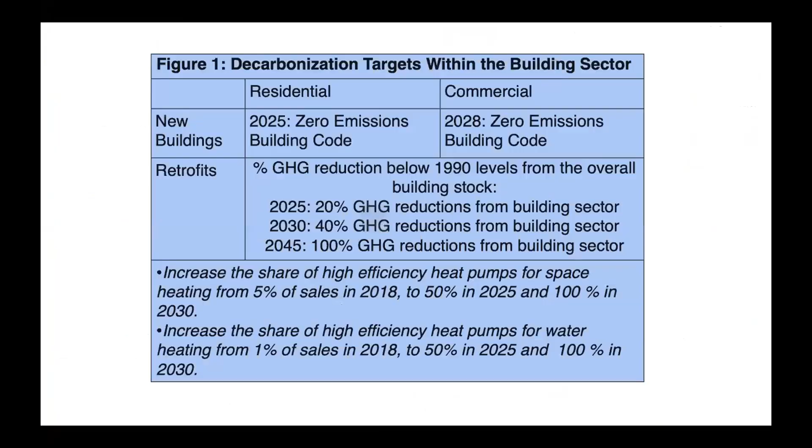Earlier this year, the coalition adopted a roadmap, which was our recommendations for where we think California should be going to eliminate greenhouse gas emissions from the built environment. This was a consensus document agreed to by, at the time, 90 of our members. We've grown another 60 or so members since January. And it laid out some numerical goals that we thought California should meet, including the state should adopt a zero emissions building code for residential buildings by 2025 and commercial buildings by 2028. And that through retrofits, policies, programs, incentives, financing, et cetera, we would bring about a complete elimination of greenhouse gas emissions from the built environment by 2045 or sooner.

Implicit in that is the sales numbers for heat pump technology, air source heat pumps and heat pump water heaters, to dramatically scale sales so that by 2030, 100% of all heating equipment sold in California would be of the heat pump variety. I will just say that as of this week, we now have 17 local governments that have adopted a reach code that either discourages or completely disallows natural gas hookups in new construction. Pacifica and Santa Rosa on Tuesday became the 16th and 17th cities to adopt policies like that. And then we're going to see a wave more. By the end of the first quarter of next year, we're expecting that about 40% of Californians will live in a jurisdiction that's adopted a building decarbonization policy.

Behind those numerical goals, the coalition also identified 5 goals that are going to be necessary if we're going to meet these targets. The first one is really building awareness across all participants within the energy space in California, from providers to businesses to end users. We need to make sure that through rates and rebates and financing, customers are receiving a good value for the building decarbonization measures that they install. And we need to make sure that the builders and installers are actually making more money installing electric appliances that rely on clean electricity rather than fossil fuel appliances.

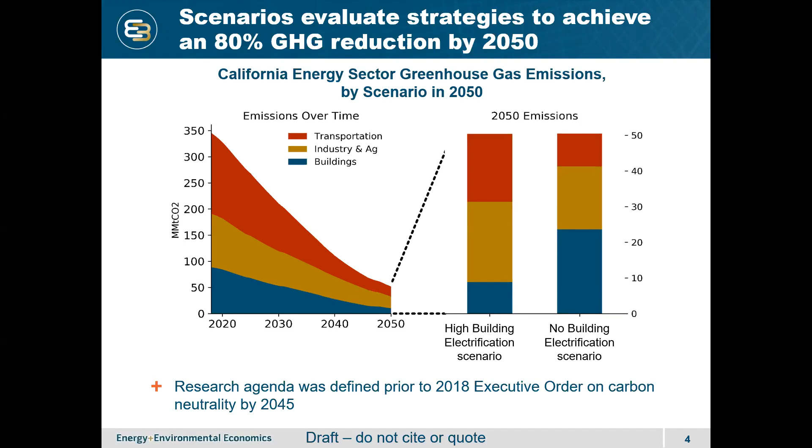As I mentioned, we used the California Pathways model to model these and work them up. And that work is really building on a report that we published in 2018, also with the California Energy Commission EPIC research grant. And that study is called Deep Decarbonization in a High Renewables Future, if you're interested in learning more background about our modeling approach and framework.

So across all of these scenarios, there are 4 key strategies to decarbonize energy. And these 4 strategies, energy efficiency and conservation, electrification, low carbon electricity, and low carbon fuels, are common across all of the scenarios that we've ever evaluated and all of the regions that we've looked at. Even outside of California, we've done deep decarbonization scenario work in Minnesota and the Pacific Northwest, across the U.S. as a whole, other places in the U.S., and these 4 themes are consistent.

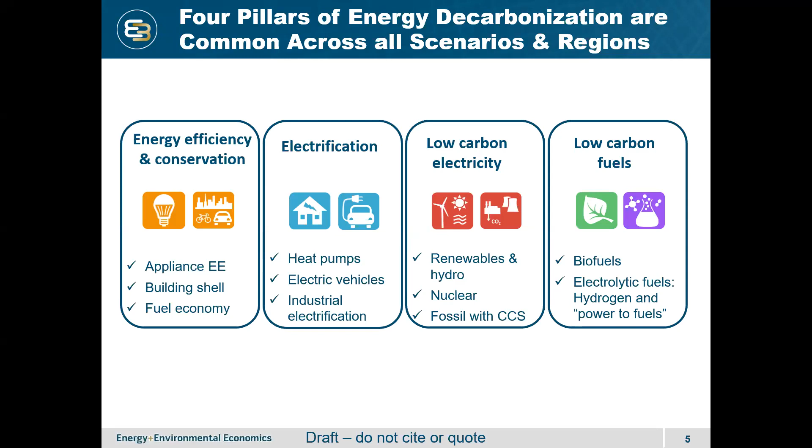What varies is the relative emphasis on each of them and the different strategies that can be employed within one of the given pillars. So I'll talk about how we use each of these in our work going forward. This work is really focused in on strategies to reduce natural gas emissions from buildings. And I'll talk a little bit more about the reason for why that is.

We were looking at the natural gas distribution system in California. And it turns out that the majority of that system is built and designed to provide gas to buildings. We have transmission level pipelines that serve gas primarily to industry and electric generation. But the bulk of the cost of the system is really in the distribution system, and that's all aimed at getting gas to buildings. So how do we reduce gas from buildings?

And as I said, we looked at these two bookend scenarios, a no building electrification scenario where we're blending renewable natural gas in the pipeline, and a high building electrification scenario where we're really emphasizing a transition towards electrification and electric heat pumps. There may be a third option, which is a hybrid option where you could have electric heat pumps with gas backup for reliability and meeting peak heat needs.

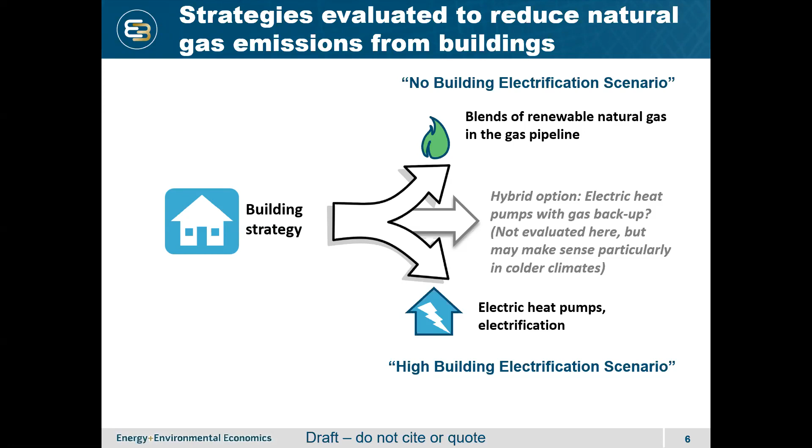We didn't evaluate that in this work, but it might make sense, particularly in colder climates, where we've been doing some work in Minnesota, for example, the Pacific Northwest. Some of these hybrid options might make more sense than they do in California's relatively mild climate.

Okay, so what is renewable natural gas? Just to lay the foundation, we're talking about 4 different strategies in general. Going from the left to the right, you've got waste biogas, and that can come from things like municipal waste, landfill gas, wastewater treatment facilities, dairy, manure, methane capture. And those tend to be the lowest cost and most commercialized of these options, but they're also limited in supply because of the availability of those waste resources.

You've got gasification of biomass as another option, and that involves taking either waste and residue, agricultural and forest products, gasifying it and turning it into biomethane. Or you could even assume that there's purpose-grown crops, such as developing switchgrass or miscanthus and turning that into biofuels.

In these scenarios, we don't assume that there are any purpose-grown crops due to both the lack of commercialization of that pathway as well as the land use, land change, sustainability concerns around the development of purpose-grown crops. So for this work, we're assuming that waste and residues are available as a biomass product to make biomethane. And then you've got hydrogen.

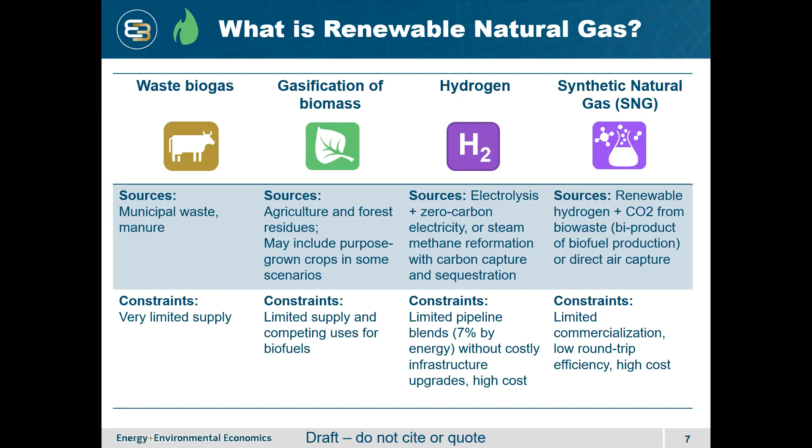We looked at 2 different scenarios for hydrogen costs. And when I say we here, I really mean our partners at UC Irvine took a deep dive into the literature and came up with 2 bookend ranges for a conservative case and an optimistic case for hydrogen and SNG. And I won't get into the details of those cases, but needless to say, there's more technology learning in the optimistic assumption, assuming more of a global market for hydrogen and SNG develops in order to bring that cost curve down.

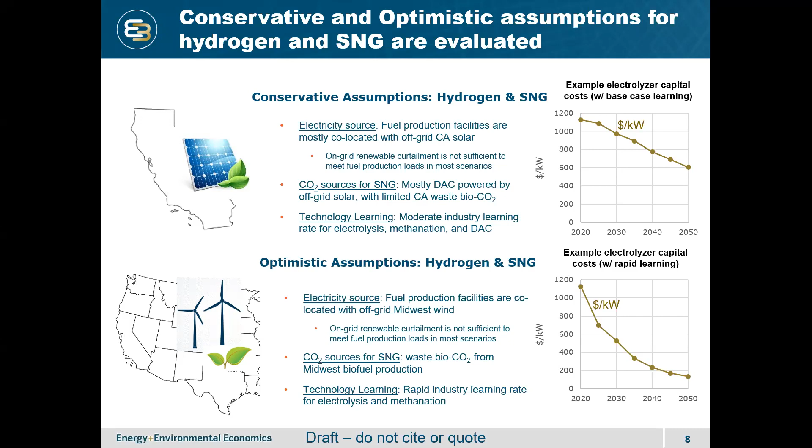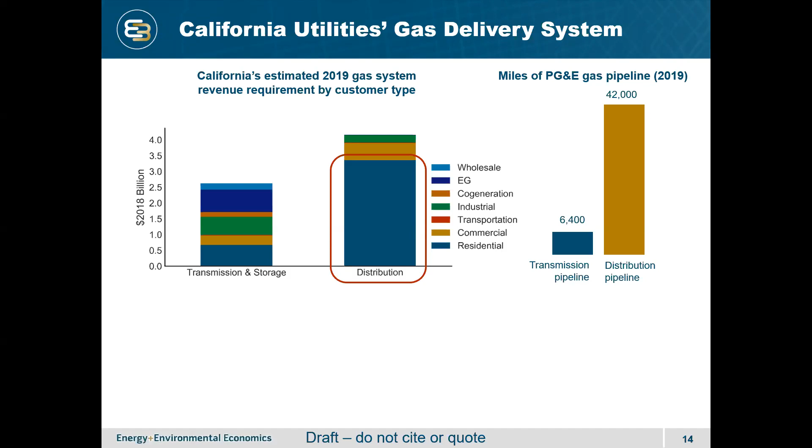And what you can see from this figure is that the biggest portion of that revenue requirement is in the residential distribution cost. And the reason for that is because the distribution pipeline system is massive, and it serves 80% or more of California's customers. This figure on the right is an example from PG&E. It shows the miles of gas pipeline, and you can see that the miles of distribution pipeline, 42,000 just in PG&E's service territory alone, swamp the miles of transmission pipeline that PG&E owns and operates. So this also helps illustrate why this study focuses on the gas distribution system, basically the low pressure pipes that are serving gas to buildings across California.

Utilities have an opportunity to earn a rate of return on their invested capital. So, this revenue requirement in the figure above is that invested capital that they can earn a return on. The gas commodity itself is a pass-through for the gas companies. So, the total gas revenue requirement in California is about $7 billion. There's an additional $7 billion per year, plus or minus, depending on the gas price, that California spends just on the natural gas commodity itself. So I think that's just some important background information to understand about how California's regulated gas utilities are structured and where the costs lie.

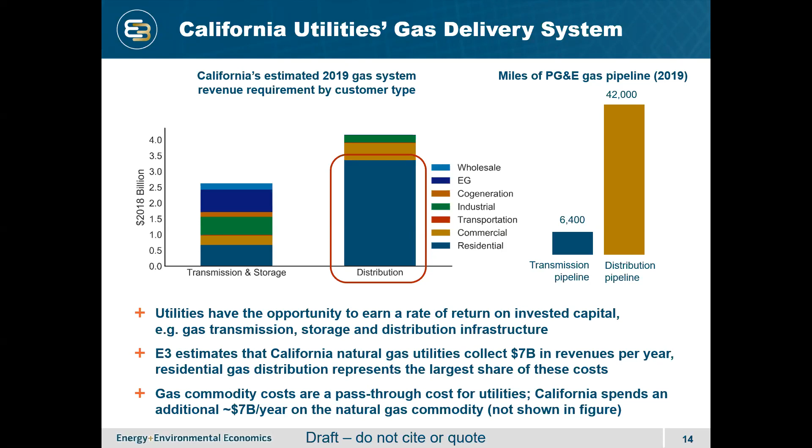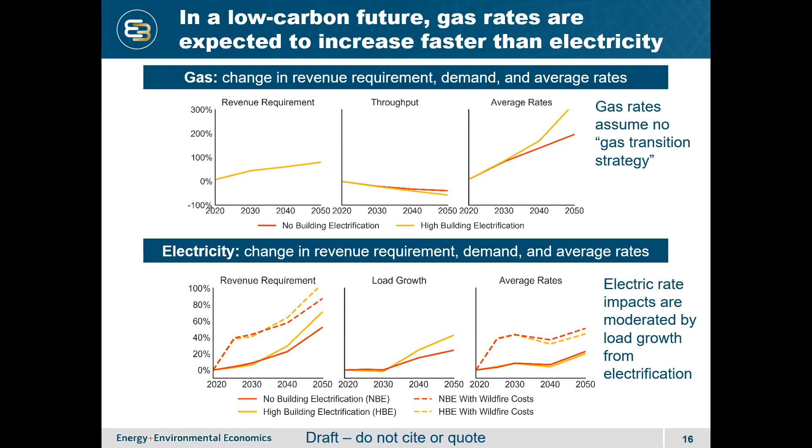But even with those higher revenue requirements, the fact that electricity demand is growing, in part due to transportation electrification, even in the no building electrification scenario, there's quite a bit of load growth from transportation electrification. The average rate ends up being kind of muted. And so we don't see those runaway increases in electricity rates in the 2030 to 2050 timeframe. And that juxtaposition is important in that we see these gas rates, the potential for those to really increase faster than electricity, driving some of the consumer economic results.

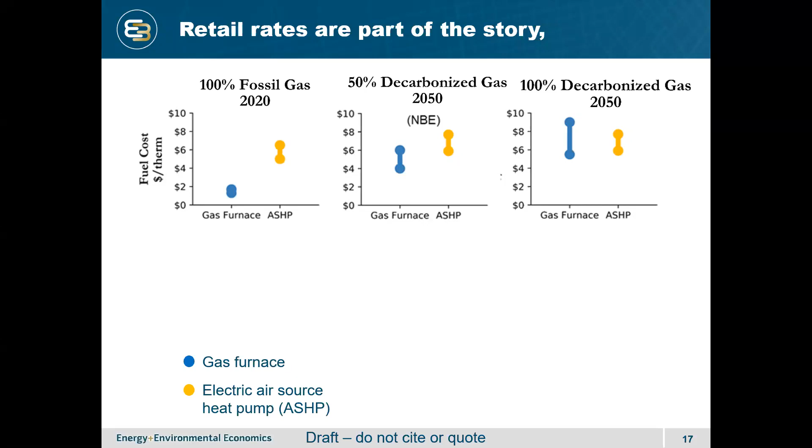And so you can see that today, electricity rates are quite a bit higher than gas rates. That's the figure on the left there. And then as we move towards a more decarbonized gas system, 50% decarbonized gas in the middle, 100% decarbonized gas on the right, you can see that the cost of gas is increasing and becoming more in line with the cost of electricity. The other piece of this story that's important, though, is fuel efficiency.

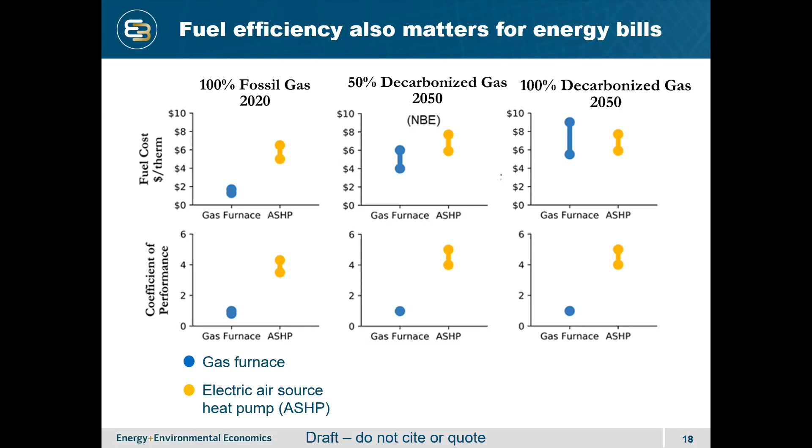So it's not just what's your rate, but how efficient are you using that energy? And I think people on this call probably appreciate this, but I don't think it's widely understood how much more efficient an air source heat pump is relative to even a very efficient condensing gas furnace. And that's expected to remain true all the way through 2050. So you combine these two pieces of information, the fuel cost and the efficiency, and you can come up with an estimate of monthly bills.

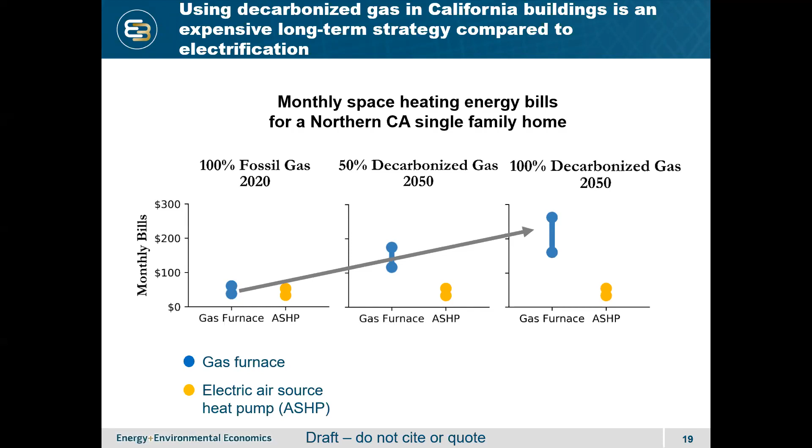And what you see on the left here is that today, a gas furnace and an air source heat pump result in about a comparable home heating bill for a typical Californian. But as you start to decarbonize the gas system, and you have higher cost of decarbonized gas, you end up seeing that it becomes much more expensive to heat your home with decarbonized gas relative to heating your home with decarbonized electricity. So that pretty basic math results, I think, in a need for some serious thinking about how do we plan for the future of our gas distribution system.

We basically see the potential for many factors contributing to a challenge for the California gas utilities' current business model and challenges for gas customers that may either not be able to electrify or continue to use gas for whatever reason. We've got aging gas infrastructure, the potential for rising gas commodity costs, including RNG and hydrogen that we talked about, to lead to higher gas rates.

On the other side, you've got lower cost renewables, higher electric demand due to transportation electrification. You've got really efficient heat pumps. You've got the building codes that Panama mentioned at the outset, leading to economic building electrification. And then we have our climate policies and climate imperatives, driving energy efficiency and renewable generation, leading to declines in gas demand. All of that could lead to the fixed cost of the gas system being allocated to fewer customers and leading to higher gas rates.

So what do we do about this? What might a solution look like? We know that there are long lifetimes to this gas infrastructure. A gas distribution pipeline might have a book life of 50 to 65 years in our current regulatory framework. And if we build that today in 2020, we'll be amortizing that in our bills through 2070. That's going to be a challenge if we're in that world of declining gas throughput and spreading those costs over a fewer number of customers.

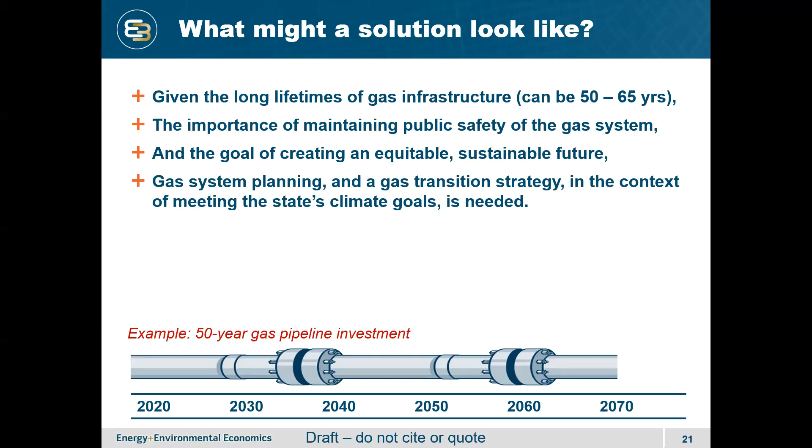So I think all of this points to the need for gas system planning and what's come to be called a gas transition strategy. And we need to think about this within the context of meeting the state's climate goals. So our paper considers a few different gas transition strategies. We're not making policy recommendations about one specific approach to solve this challenge, but really just highlighting that we need to start thinking about this as a state due to the long timelines involved.

But what we look at in the study is strategies that seek to do two things: first, reduce the cost of the gas system while ensuring that there's the ability to continue to reinvest in the safety and reliability of that system, even as we shrink the system and reduce the cost of it. And then think about different strategies to equitably allocate the fixed cost of the gas system that has been built up over the last 100 years in California.

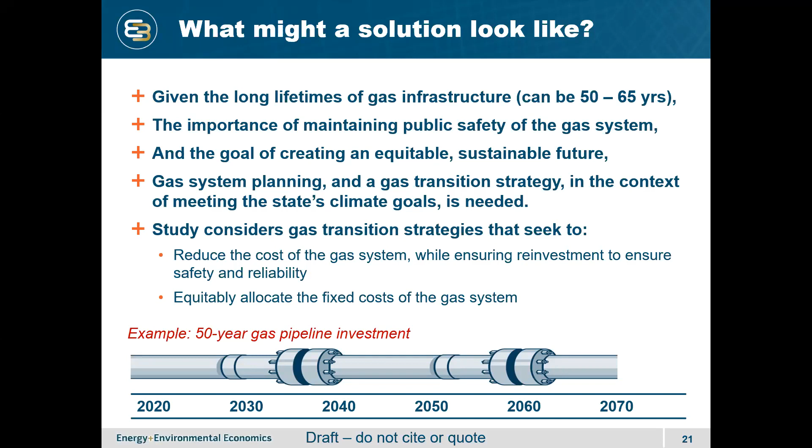So I think it's worth a little bit more research and thought about how this type of targeted electrification might work, how much it might cost. I think it's probably worth considering many aspects of this from the engineering side to the cost and policy side. There's challenges, of course, with targeted electrification as well, because it may involve early retirement of the equipment if the homes in that community all have different vintages of water heaters and space heaters, and early retirement can also be quite costly. So a simple solution here is targeting all-electric new construction to avoid the expansion of the gas distribution pipeline in the first place.

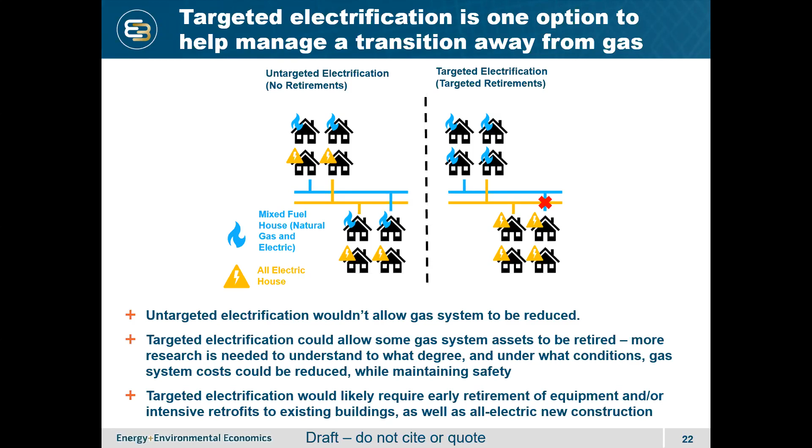This is, again, a draft study. It's not finalized, but the key conclusions thus far can really be boiled down to three points. Building electrification lowers the total societal cost of meeting our climate goals using technology that is available today. And that's not to say that we don't also need significant quantities of renewable natural gas to meet our climate goals. In our scenarios, we absolutely do need it, and it ends up directed mostly towards decarbonizing the industrial sector and the off-road transportation sector. But in buildings, due to those efficiencies of the heat pumps that I discussed, it ends up looking like the lower cost option to electrify buildings.

In all of the scenarios that we evaluate, we see gas demand decreasing. And when gas demand falls and the cost of maintaining and operating the gas system does not, you end up with average costs for the remaining gas customers increasing. And I think that raises serious questions about how to equitably allocate those costs.

And so this study is basically pointing to the need for a gas transition strategy, both to reduce the cost of the gas system and to protect low-income and vulnerable customers from the potential for higher energy costs.

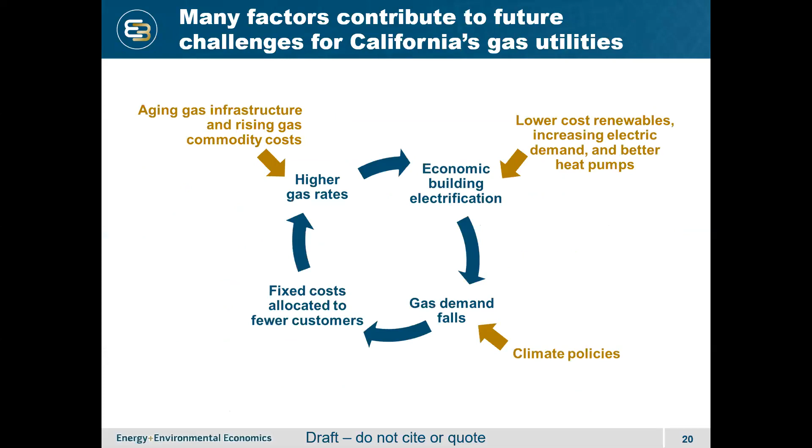From Christina Garcia, she has two questions. The gas demand decreases in all of the greenhouse gas mitigation strategies because of the assumed increase in electric vehicles. So with or without building electrification, we can assume gas prices to increase? No, I don't think that's quite right. So I'll just pull this chart up. The gas demand decreases in the electric generation sector due to renewable generation displacing gas power plants.

The gas cost increases; there's an increase in the commodity cost because RNG is expensive. And then in a high building electrification scenario, you have this additional factor, which is lower gas throughput in residential customers leads to fixed costs being spread over fewer customers. So there's two factors driving higher gas costs. One is the high cost RNG, and the other is the lower demand for gas. Okay, and where is that lower demand coming from?

Yeah, so the lower demand varies by scenario, and maybe we're getting confused. When I say gas, I mean natural gas, not gasoline. So the question about transportation was throwing me off, because this isn't really a story about transportation. The lower gas demand is coming from renewable generation displacing gas generation on the electric gen side, and that's just sort of one piece of the story.

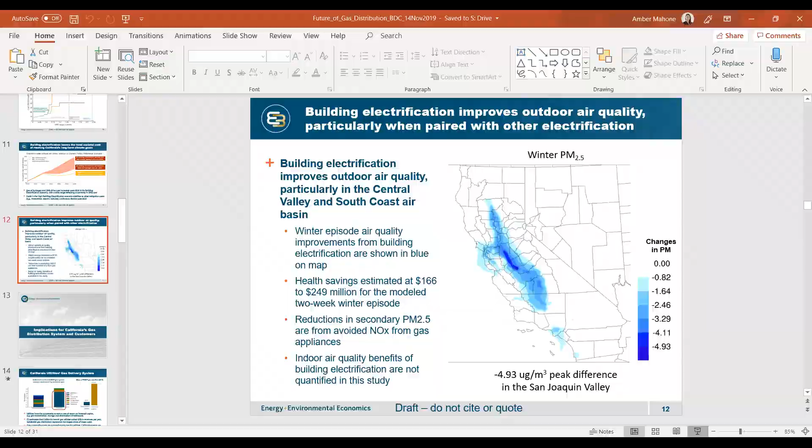Thank you, everyone. Yeah, so the air quality, this is a winter episode that is identified as having the highest air quality challenges. And so in the building electrification scenario, we are now using air source heat pumps and heat pump water heaters to heat our homes and heat our water. And that is avoiding a significant amount of NOx emissions. And those NOx emissions then are avoiding a significant amount of wintertime PM 2.5. And that's what's really driving the health benefits.

Now, I want to say there's also health benefits and air quality benefits from electrifying transportation or industry. And those, in fact, may be larger than what you see from electrifying buildings. But it's not insignificant. And this was the first study that I'm aware of where we were able to isolate the role of gas use in buildings in driving outdoor air quality problems, and how much we could avoid those outdoor air quality problems through electrification of buildings.